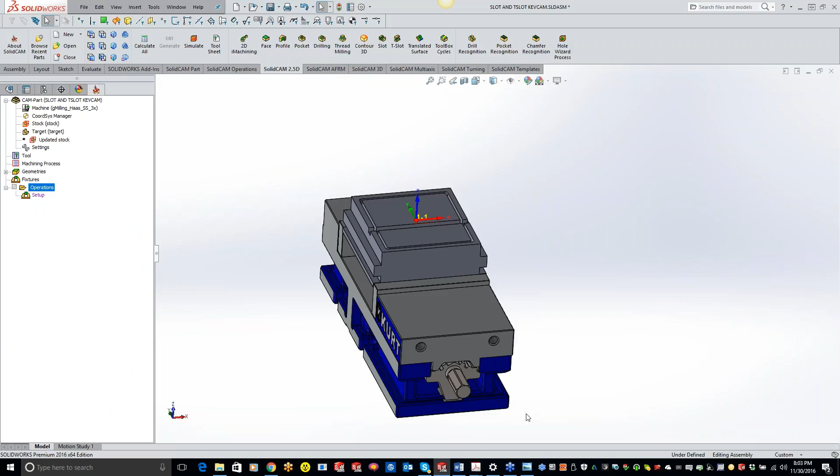But I think with that being said, we'll get the ball rolling here. Like I said, nothing too exciting tonight. We're going to be covering T-slot and slot. Came up with a part with a couple different scenarios of using the T-slot and slot. So with that being said, we'll get the ball rolling here.

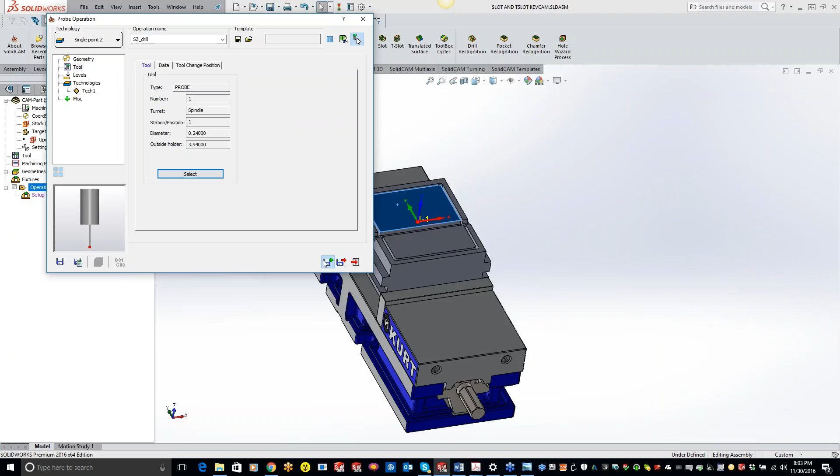So first things first, like I always like to do, is we'll add a probe on there. Find out where our part is located at. Let's do a Z touch-off point right there. Grab our tool. And save and copy. And we'll do, and got our tool already set. We want to do our X and Y.

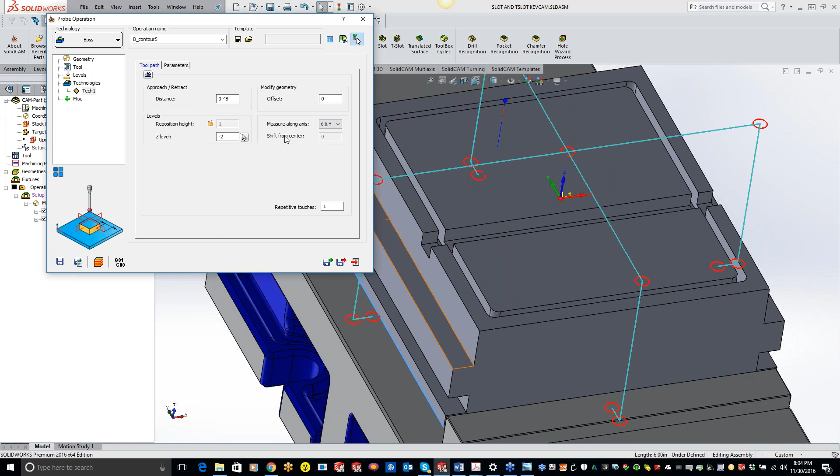And let's just do a show so I can see where I'm taking my hits here. Definitely hitting a little too deep, so I'll move those up here. Now this will be probing off the stock for you guys, and basically we're finding our X, Y, Z for our part right there. Okay, so now we have our part probed up. We know where our part is in our machine.

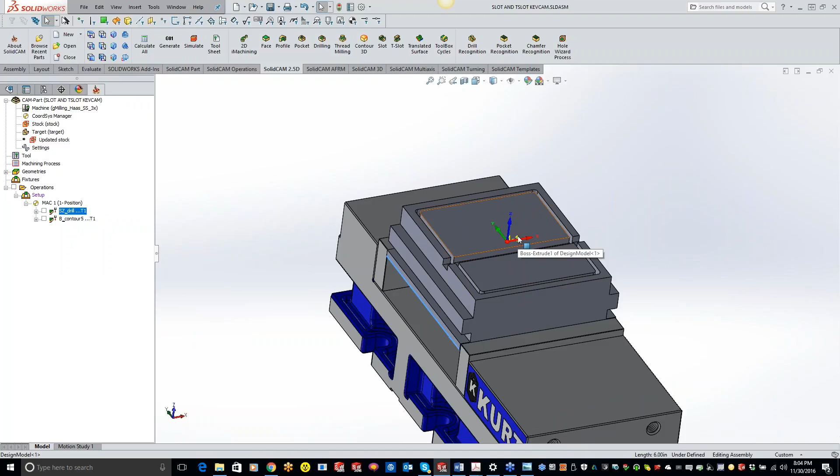So now what we're going to do is do the T-slot. Pretty simple, easy to use. With the T-slot and the slot function, you guys can do these functions in other operations like Profile or Contour 3D. What they've done is they kind of just simplified it for you guys just to make it more proficient.

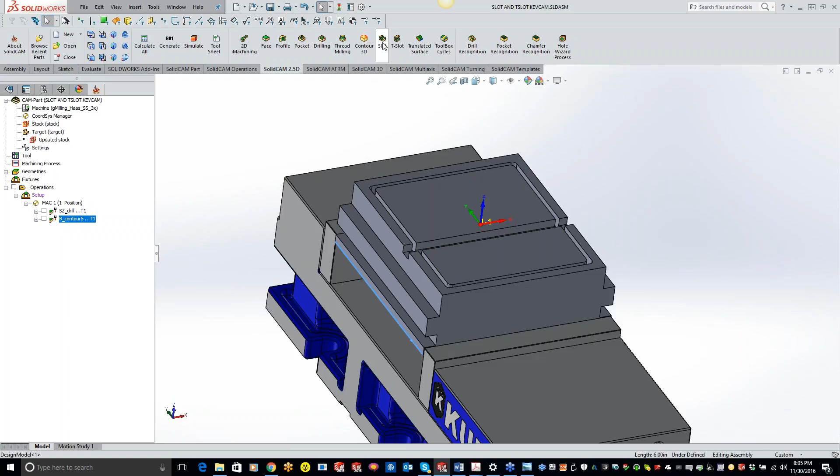So first things first, what we'll do is we'll just do a T-slot. And your geometry is going to be the innermost geometry that you want that cutter to come up to. So we're going to click on the inside of that wall. So let me delete that chain. I have my tangent propagation turned on here.

So grab that innermost part right there, and it's basically where you want the edge of the cutter to be riding along. Now, it doesn't matter, you know, the levels right now or anything like that. We'll hit our green check mark.

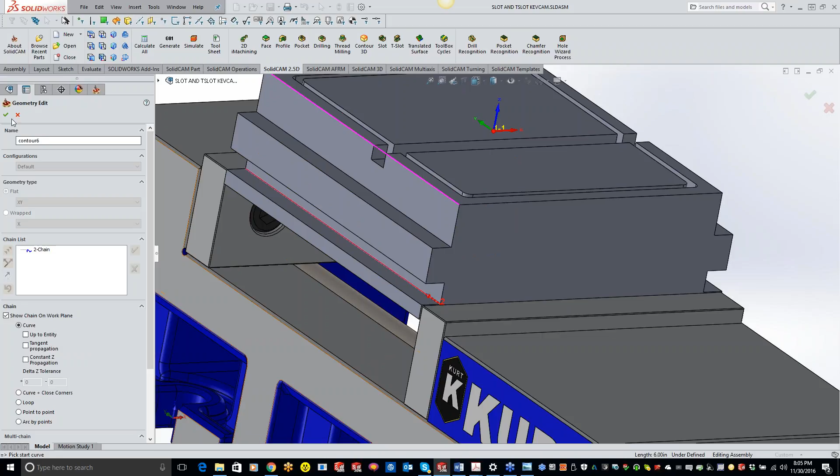And what I did is I have a T-slot cutter in here, and actually this T-slot cutter that I'm showing right here is the same cutter that you guys have in your library. This is a cutter that I pulled out of the master for, I can't remember if it was master for aluminum or mild steel, but you guys all have this T-slot cutter in there, and there are several T-slot cutters in there. I actually pulled these from where I used to work, just random tools there.

So we'll grab that. 1.5 inch diameter. We have arbor diameter, shoulder length. I have my tool holder on there. Let's turn some coolant on. And we're good to go now. Now the levels are going to look a little bit different than what you guys are used to seeing. So now we don't really have an upper level. It's going to be kind of pulling off of the clearance level, but it's asking you the ceiling height.

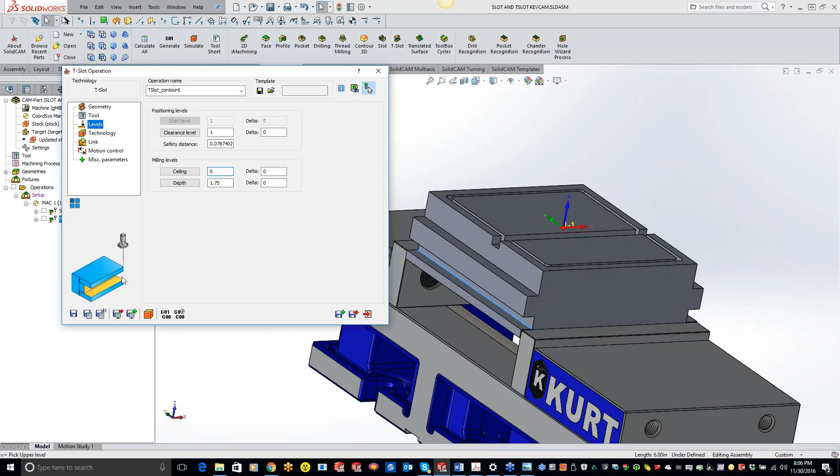So as I kind of highlight, or if I just click on it, you can see right here it's asking for the top portion of the ceiling. So we'll just click on that. And then how deep are we going? So now I'll just click on the bottom, how far we want to go down.

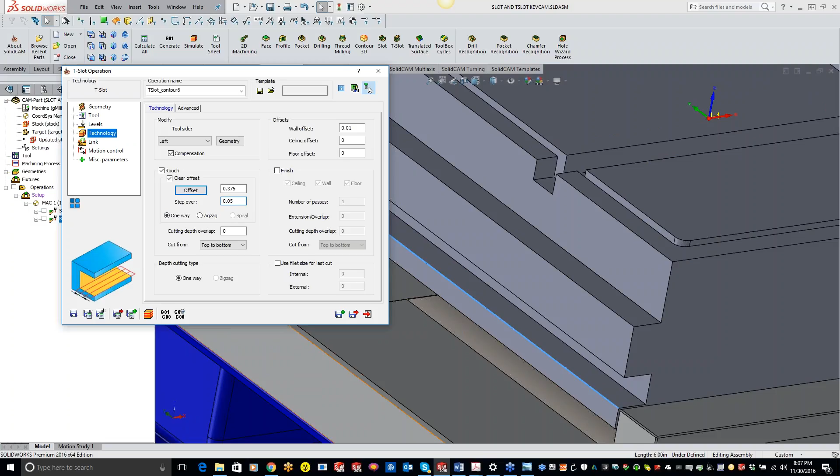Now in the technology, there's a lot of cool stuff in here. Usually with T-slot cutters, we're going to have to take multiple passes just because you can't really bite off a ton at a time. So what we'll do is we'll do a rough pass, and we'll do a clear offset. And then I'm going to offset it out to the outside of the geometry right here. And we'll step it over every 50 thou. So basically we're going to come in here, take a 50 thou cut, going along. It's going to arc out, come back, do another 50 thou cut.

Now, getting a little bit deeper in here, you can do zigzag one way. If we actually had this T-slot going around the entire part right here, we could actually do the spiral option. And that's kind of nice because it keeps that T-slot cutter engaged with the material the whole time. So a lot of cool little options in there. Now, working our way down here, our cutting overlap. Do you want to overlap the cutter, or do you want it to go to the exact point? We're actually going to overlap it. Let's just go 20 thou right now, so that way we don't have a little witness line there from where the top and the bottom kind of met up.

Then we have a cutting order. You guys can do from top to bottom, bottom to top, middle to bottom, or middle to top. So a couple different options there for you guys. So what we'll do is we'll just go from bottom to top right there. So that's going to get us all roughed out. Obviously, we want to come back and do a finishing and get that material out of there.

So what we can do here is turn on our finishing, and if we want to do a finish on the ceiling, the wall, or the floor, we can leave that offset in there. So we'll just leave a 5 thou wall offset, and we'll just do a finish on the wall. And doing the same way, bottom to top, and easy as that. Now, if you guys want, you can turn on your compensation. I think with 2016, the compensation should be automatically turned on for you guys.

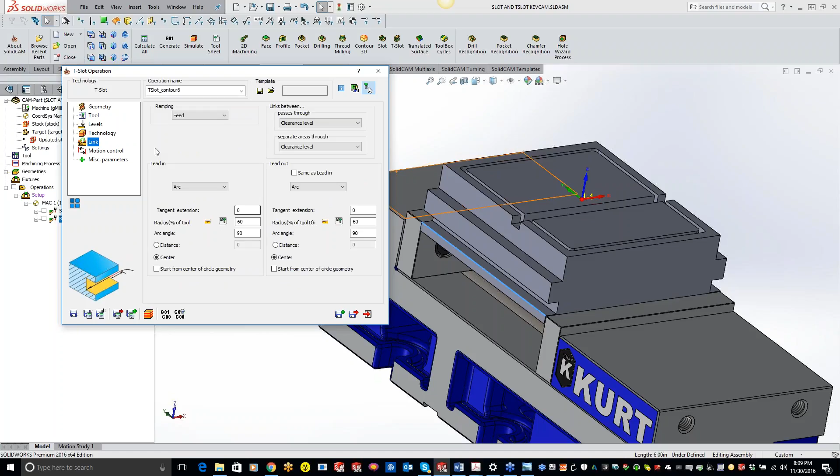Okay. So we can do cut depth, zigzag one way. You can do fillets. Go to our link, which is basically our lead in and lead out. So we can leave our radius in there. You can do a tangent extension also. One other thing here is in the geometry, we can actually extend it out right here too. So if you are in the technology section and then click the geometry button, it basically looks just like profile.

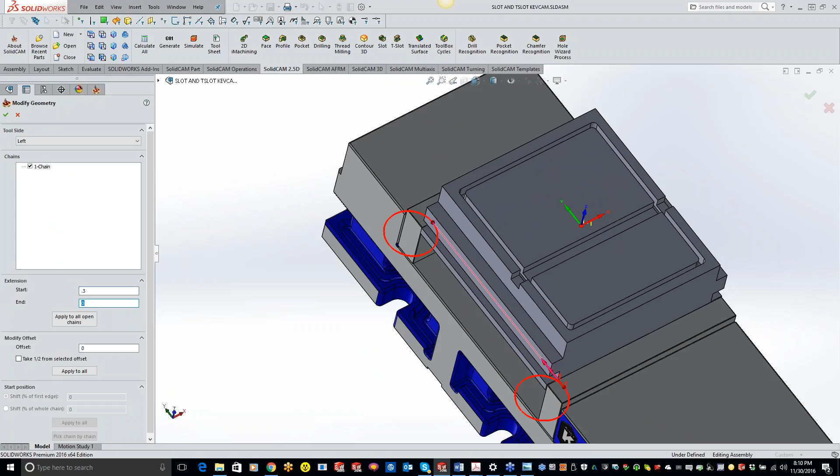We can add, you know, it might be a little much. Let's do 300 thou to our start and stop. So it goes actually beyond the part right there. And then we can say apply to all chains, and it basically scoots everything out that 300 thou for you guys.

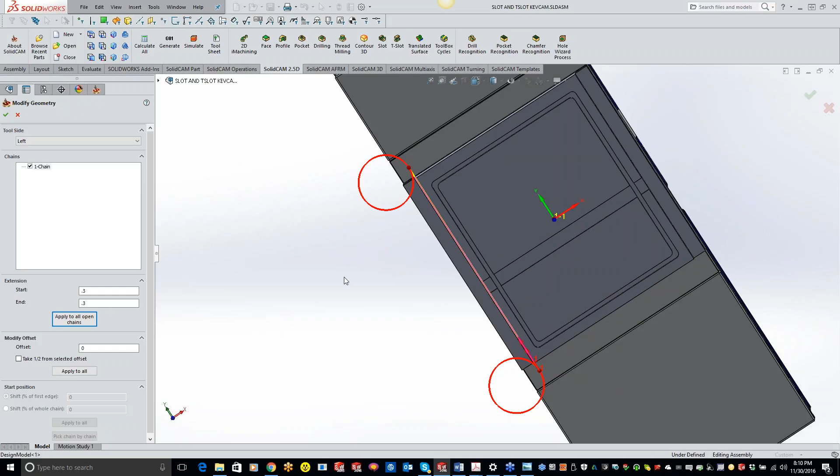Now, if we do a straight down view, we are still coming down on material, but since we are using that lead in and lead out of the arc, we'll be able to clear that material without any issues. Okay. So let's just do a save and calculate, and let's see what we have going on right here.

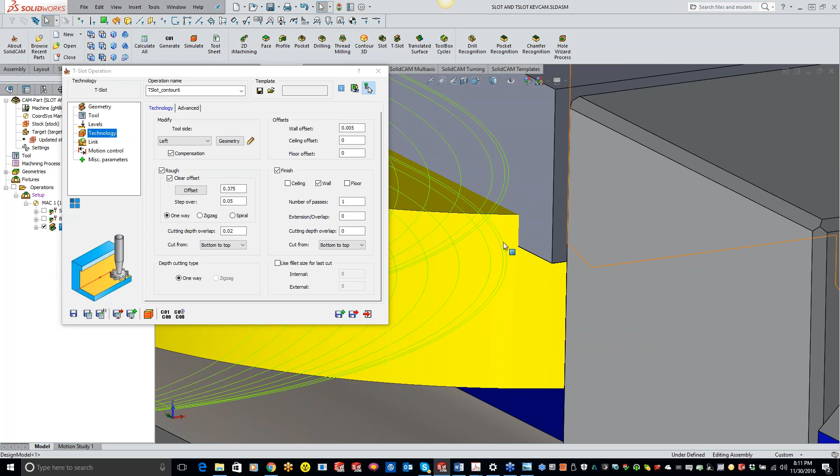So you can see we started at the bottom right here, taking its passes, and we can actually see our finish pass, which is our last green line right there, of wiping that additional 5 thou material off there. So let's go ahead and do a solid verify here. You guys can actually see what we're cutting here. So nice light cuts. We're not taking it all in one big chunk.

And you'll notice what it does is it actually does both. It gets both the upper and the lower at the same level. So it just doesn't focus on that bottom and then move up to the top. We did have that to begin with, but what we found out is we're actually getting a little bit of deflection when we were doing that. So we're kind of roughing it out all down to size for the upper and the lower.

And we can speed this up here a little bit. And you guys can see I am just barely clearing my Kurt vise there. I think I gave myself about 50 thou clearance there, maybe it was even 20 thou. But all said and done, we can check our size real quick. And it shows that we're right up to size, up to 0. Still showing that we still have material here.

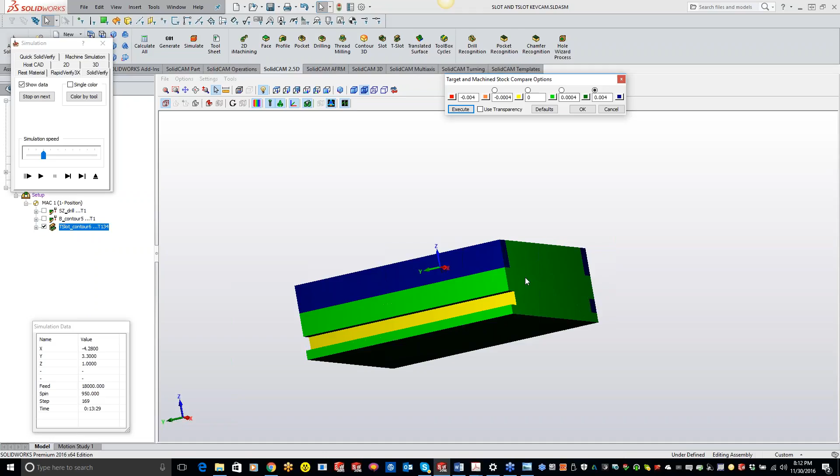And if those of you guys aren't sure what I'm clicking on here, it's basically looking at your stock target comparison, finding out how much material is there. So our part is where the green yellow is, I have a pretty tight tolerance right now, but anything beyond the green yellow or even orange is all additional material. So you can see that I still have all this extra material to still machine off.

Okay. So now what we need to do is we're going to do that same thing for the top right here. And I understand you guys saying, well, why not just do that with profile in a standard end mill? And most definitely, we could, and it's probably a much faster cycle time. But I just want to give you guys an example of what it's going to look like when it's taking multiple steps and we actually don't have a ceiling anymore.

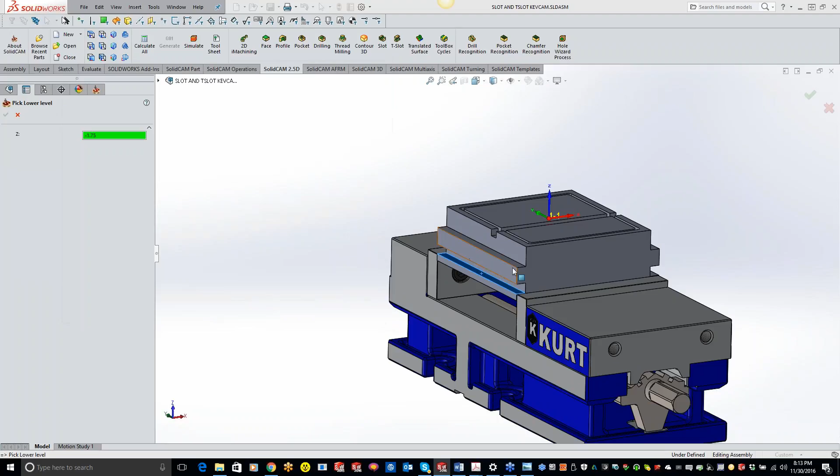All right, so what we'll do is just do save and copy, because we're going to be using that same end mill, same geometry. The only thing that we're going to be changing is the levels. So now our ceiling height is actually going to be the top of our part. And the depth will be to our bottom right here.

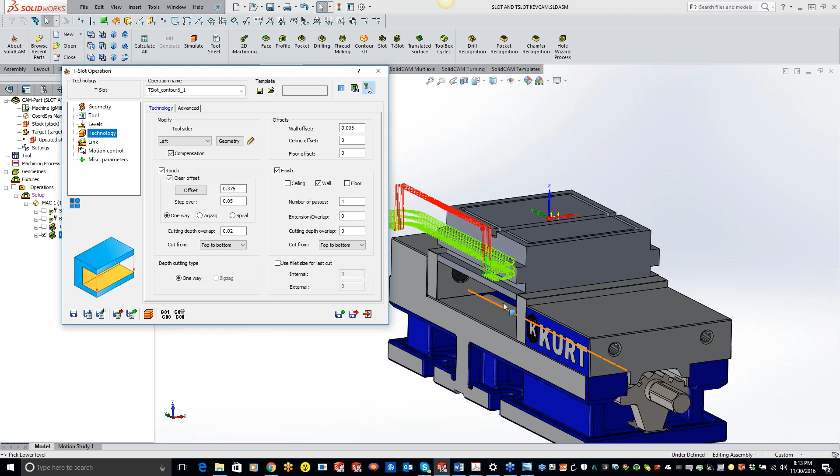And we can basically leave everything the same, except this time I'm going to start from the top. So that way I don't have anything above me, and I might as well start up on top and then work my way down to the bottom. So I'll just switch this, go from top to bottom. Save and calculate. And we get our toolpath again. Now you'll see we're actually taking this one in 3 passes. And it's all dependent on how much you want to go on your step down.

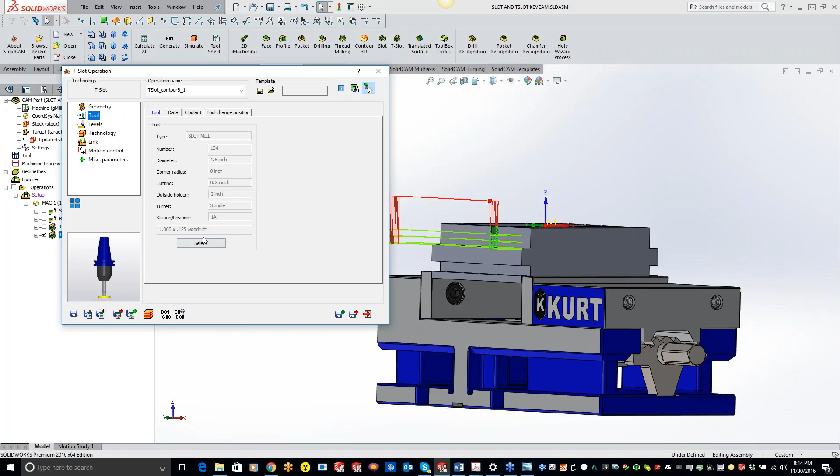If I wanted to go larger step down, I can make that number, or that's my step over. My step down is automatically calculated with the width of, I'm trying to find it here, of my cutting length right here. So it knows that it can only go a max of

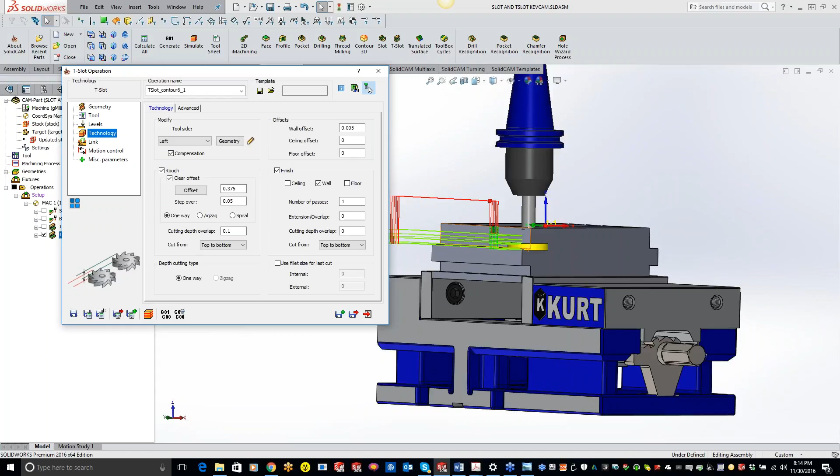0.25, but if I don't want to take it in that much, I can increase this cutting overlap right here. So if I do this to 100 thou, you'll see that we actually add additional passes in there because of the overlap. So a little bit lighter cuts on the cutter that way too. So we can simulate that here.

Like I said, getting it all to one level, going down to the next. If you guys want, you have the single step button right here. Instead of clicking this button, if you're getting to a spot, you can just hit the space bar on your keyboard, and that will go through for you too.

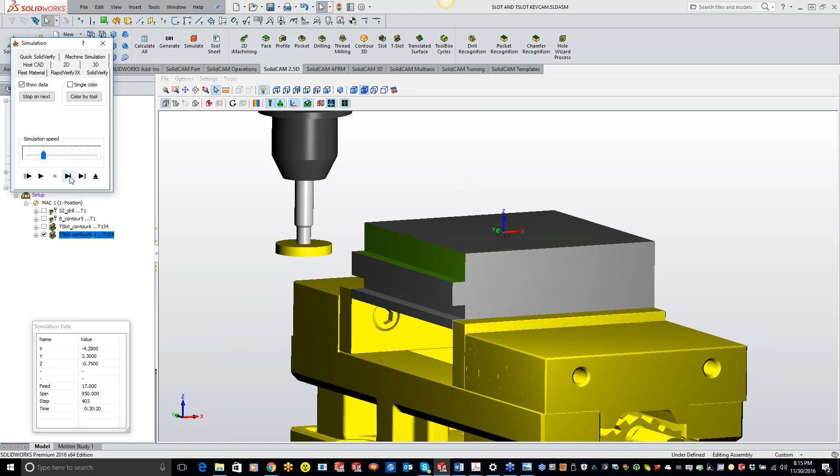Okay, so we got our T-slot for the bottom right here, and a T-slot with kind of an open top. Do we have any questions so far with the T-slot?

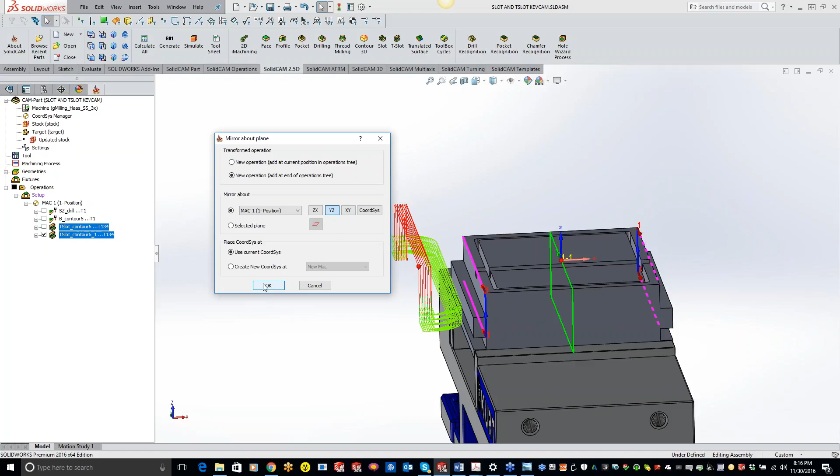Okay, so what I'm going to do now is, since we have the exact same thing on the other side, I could go through and make another T-slot operation. But to save us some time, I'm just going to right-click and use the mirror feature they added in 2016, and do my YZ. As I click this, you can see the plane in green moving around. So I'll do around there. You can do new operation or new operation at the end of the operation tree, so we'll do that option, and we'll just hit OK. Now we have both sides.

So if we want, we can go through Solid Verify just to make sure here. We're good to go. We can just double check it. So we're yellow and green, so we're good to go.

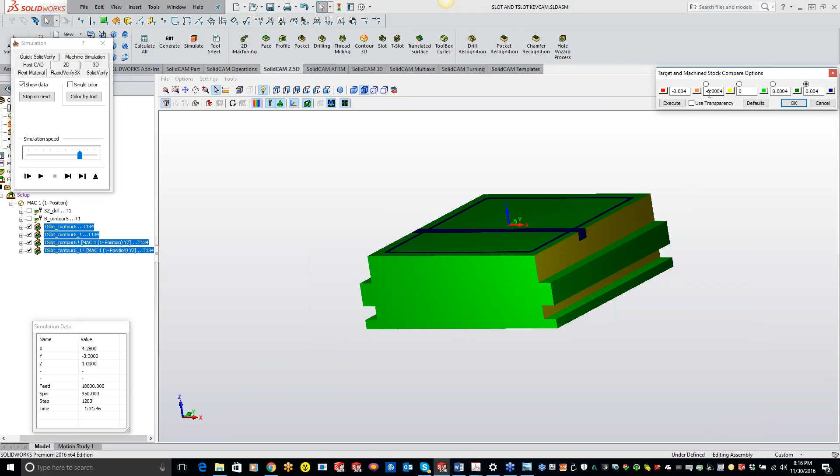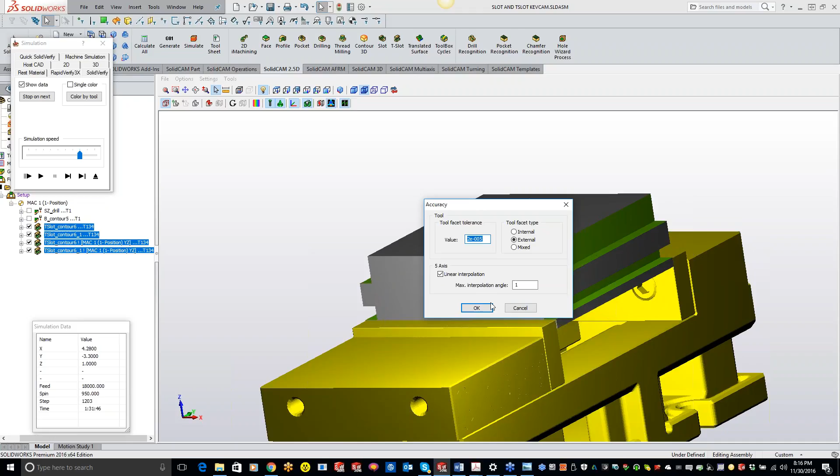With your tolerances right here, like I said, I have mine pretty tight. Now these tolerances are going to be based off of your accuracy of your model. Right now I have my accuracy set pretty tight so I can see it better. I think with the default install, it will actually be set to 4 thou, so definitely crank that up. It's going to take a little more cycle time to render it, but you'll definitely see a lot more detail the more you have in there.

So we can zoom way in on this part here and see how nice our cuts are, see our surfaces and all that good stuff.

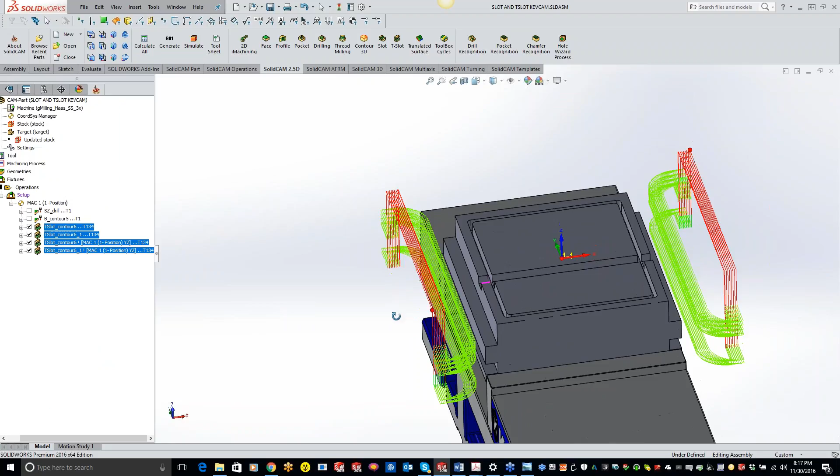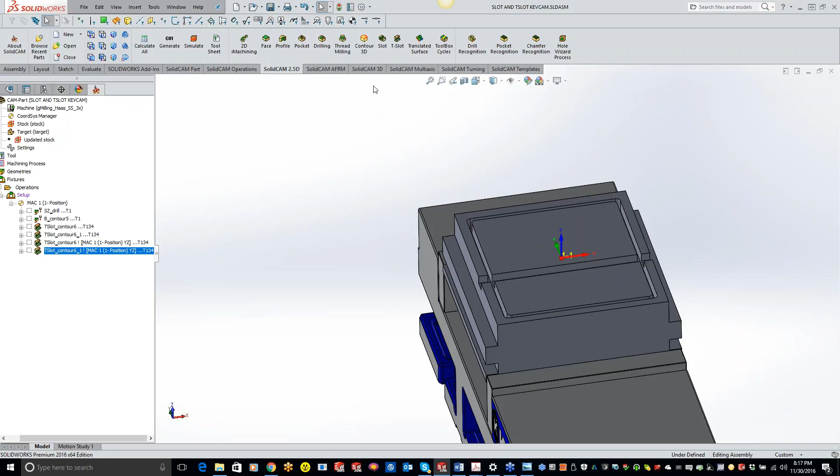So now what we're going to do is let me uncheck these. And what we're going to do is the slot. Now the slot feature is a dummied down version of kind of the profile. They kept it real simple, easy to use, not a lot of gizmos and functions in there. So we'll just go ahead and click the slot. What we'll do here is I'm going to do these two slots right here, so we'll grab that one.

Kevin, when you get a chance, there's a question regarding the simulation shortcuts. Like you were saying, if you're on that play button, you can hit the space bar - I think that's what Ronnie was asking. Oh, okay.

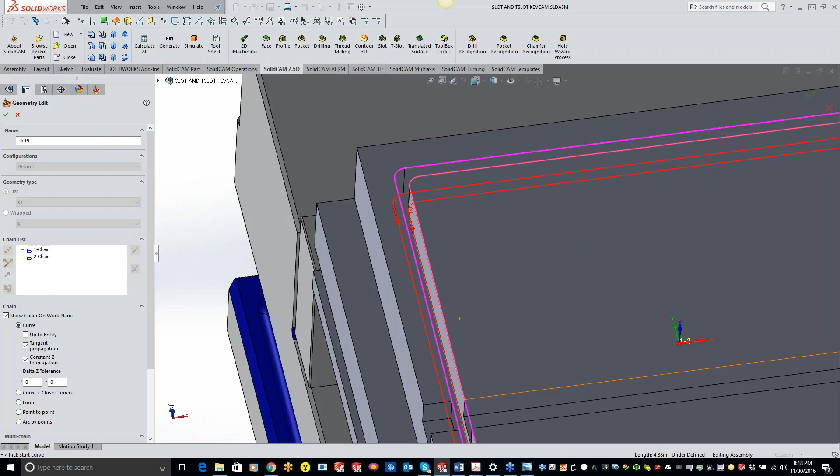Ronnie, I don't have a list of actual shortcuts or short keys. That's the only one I know about, and there's actually one I just found out about today, and it's really nice. Let me exit out of here. To answer your question, Ronnie, that's the only one I know about for the simulation - hitting the space bar when you're on single step mode.

But let's say I want to chain the outside edge of this part. Normally what you'd have to do is - hang on, let me turn off my propagation here, let me delete that - if I wanted to chain something, normally you'd have to click there, hit the green check mark, go to your next chain, click the green check mark, go here, click the green check mark.

So I just found out today a trick to this: when you go to chain, if you hold your control key and then just click where you want it, it will automatically accept those chains for you, so I'm not having to come over and click the green check mark. Then when you're on your last chain and don't want to do any more, just hit the green check mark and it adds all those chains. So that's a little shortcut for the chaining technique - if you have multiple chains, just hold your control key and it will basically automatically hit that green check box when you go to click on your next chain.

Am I seeing it right that it's actually doing extensions, or is it just chaining the actual entities themselves? Yep, it's just chaining the entities themselves. Okay, so it's not doing an extension or anything like that.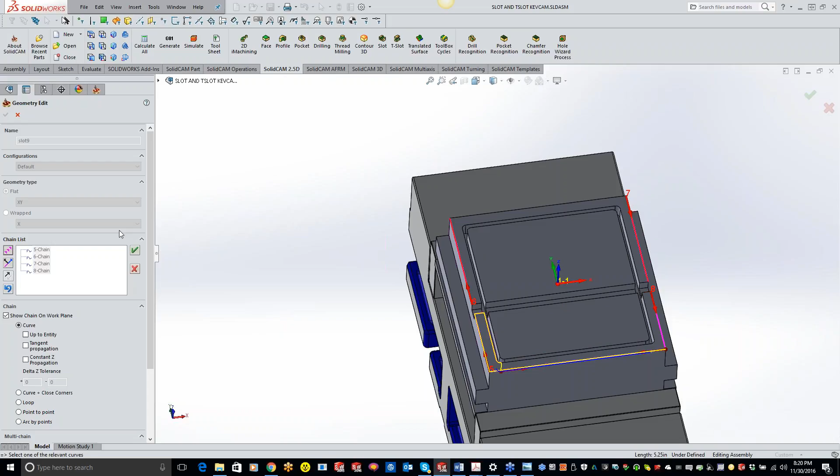But if you guys do a lot of single entity chain picking, it's a cool feature they added of just hitting that control key. Okay, so we'll get back to our slot here. Oop, got my wrong one.

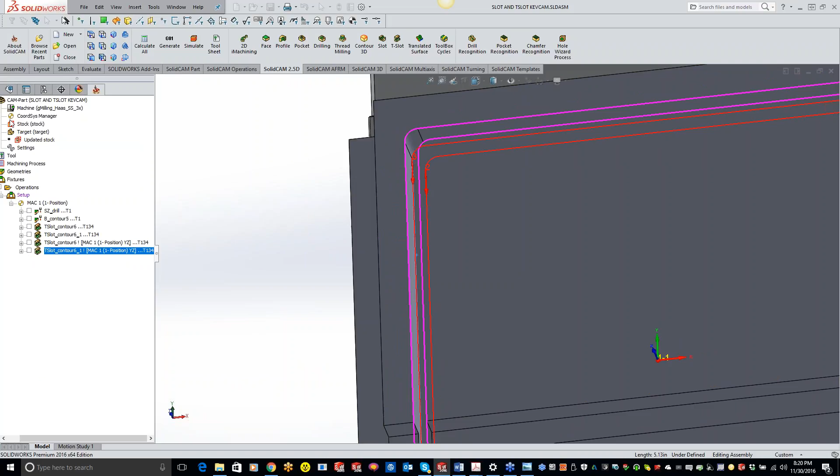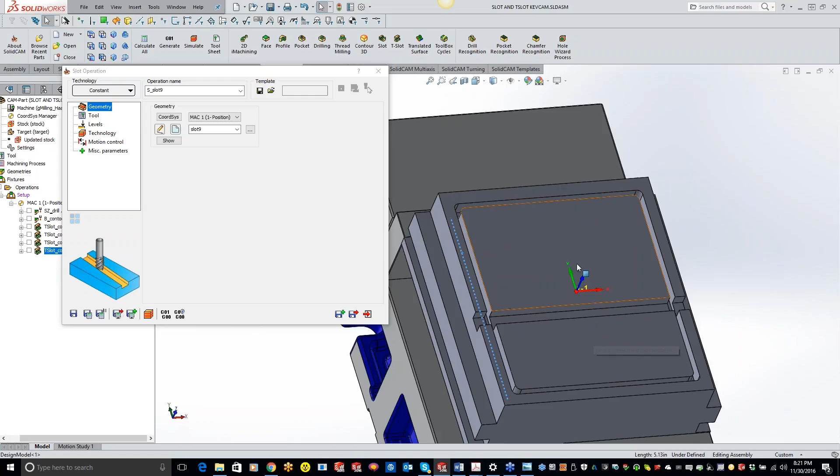And I'm going to do this like an O-ring groove here. I'm just trying to give you guys examples, and I know some of you might say, well why don't you use the toolbox cycles, because in toolbox cycles they have a real nice O-ring. Just trying to show you each functionality that's in the software. I know there's a million different ways to program this part, but just trying to give examples of the different operations we have for you guys.

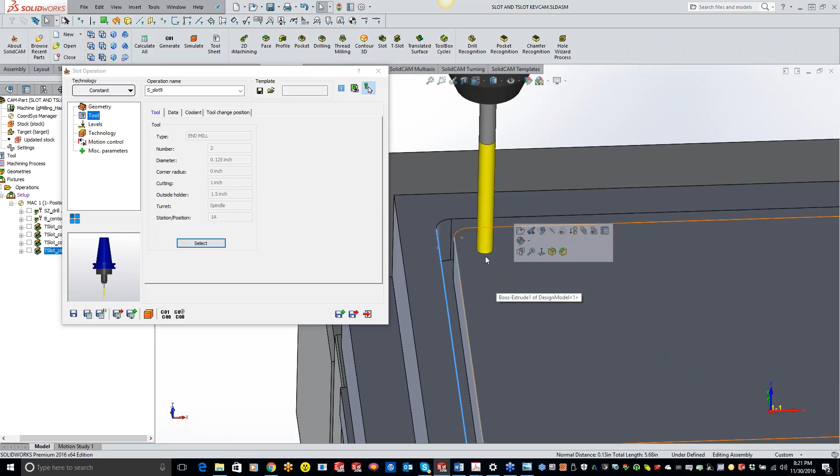Okay, so we'll grab a 1/8" end mill here. Now our slot actually is, I think it was 200 thou wide. No, it's right to size, so actually I didn't even need to pick that second chain. Oh, I do need to pick that second chain, because if I just do that outside chain, it will actually skip this radius on the inside corner here.

So, okay, go to levels. Upper level is already there. There actually is no lower level in here. So when you guys are doing your slotting operation, you can just go to your geometry tool. You can skip the levels unless you have a different upper level, and then change it right here. So what we'll do is just change it to left.

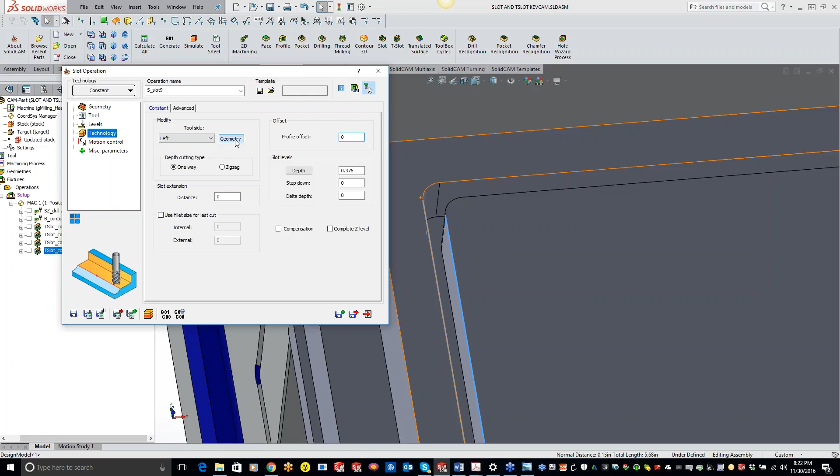And looks like I need to change my direction of chain 1. So what I'll do is just reverse that. So you'll see my tool is now inbound with the geometry that I want to go with.

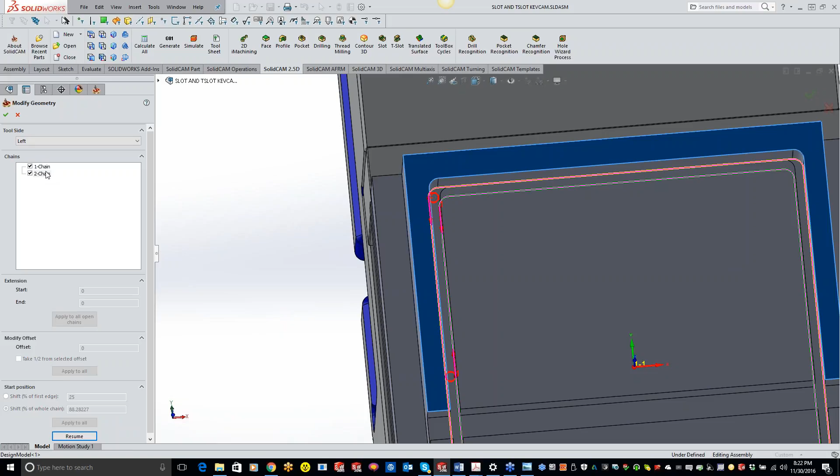Now if I wanted to start it, you'll see that we're starting right on a radius there. I want to start this halfway through the part on a straight surface. So what I'm going to do is extend it off. We'll go to chain 2 now and bring it to right there, so we're starting on a flat spot instead of right on the radius.

Now what I just showed you guys there is on the SolidCAM professional test. So just a little heads up, take your notes.

Okay, so now in here is where they kind of kept everything in the technology section that you need. So we have our slot depth. I can come in here, grab the bottom of that slot. I can tell it I want to go down every 100 thou. I can put a delta depth if I want to go a little deeper. I can turn my cutter comp on. If you had an open slot, we can extend it out right here. But like I said, it's basically a simplified version of profile, so we just don't have the finishing, the roughing, all that stuff. It's all going to do it right here for you.

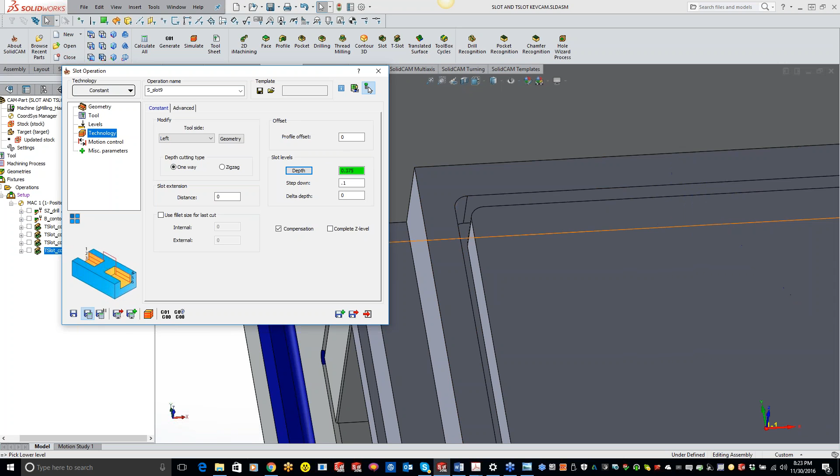So we'll just do a save and calculate, simple enough. Do a solid verify here for you guys, and just working our way around, getting that slot out of there. And you might be able to see now, let me just get rid of my holder. You'll see probably would have cut off that, wouldn't have gotten a perfect radius for the inside there.

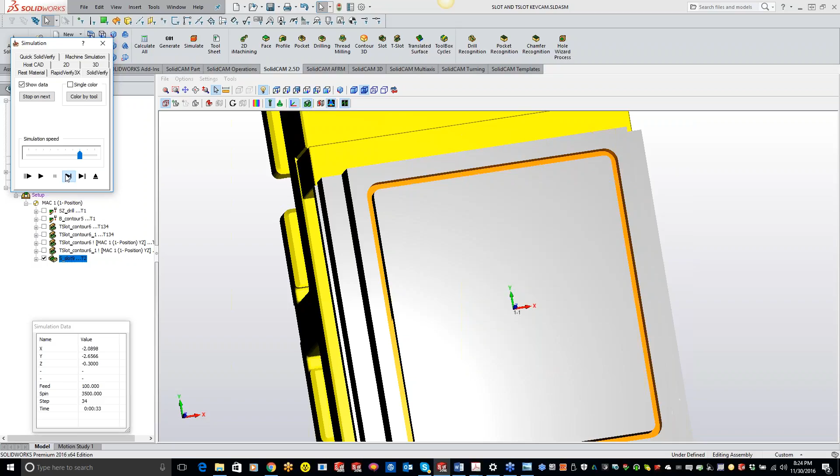But, any questions on anything that I've covered so far, guys? I know it's kind of a boring subject, but no, I'm kidding.

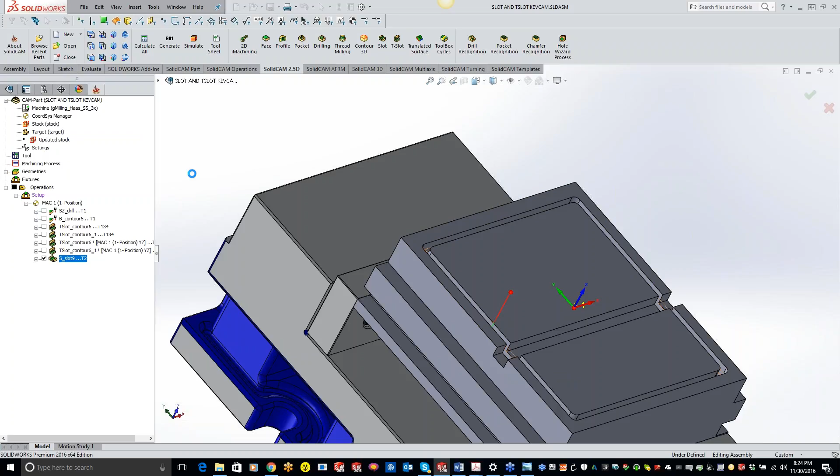Okay, so we'll do another slot right here, and we're kind of doing an open slot. Now what I'm going to do here is another slot operation. For you guys that have open geometry, we have Kevin with a question regarding spiral or ramping, and I'm thinking he's referring to depth type. Yeah, let's get in there.

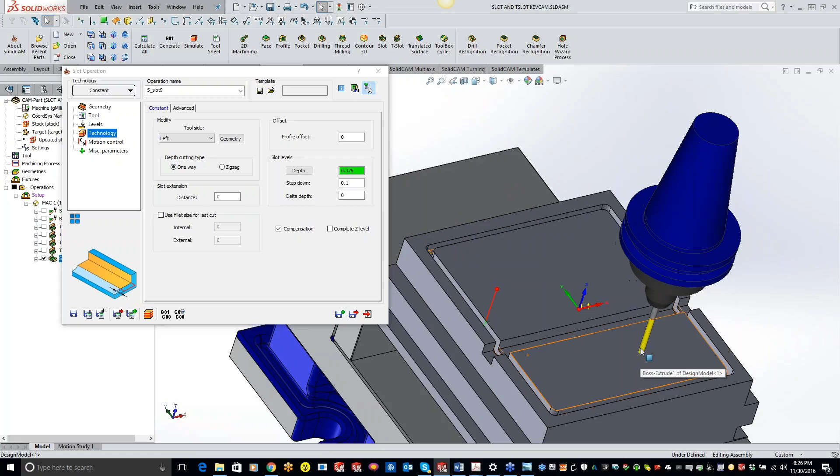simplified slotting operation. So like I was saying, if this was myself, I would use the profile operation and use the spiral feature, so I can start off shallow and slowly keep engaged all the way around that part. I also have a lot more options for my engagement, but just not, like I said, it's a pretty simplified operation right here.

To be honest guys, I've been using SolidCAM since 2007, and I've used this once. So I just like profile because you have more tools inside there to fine tweak it. More control, yeah. Whereas this is kind of just a standard - it's simplified, click, click, done. Simple, easy.

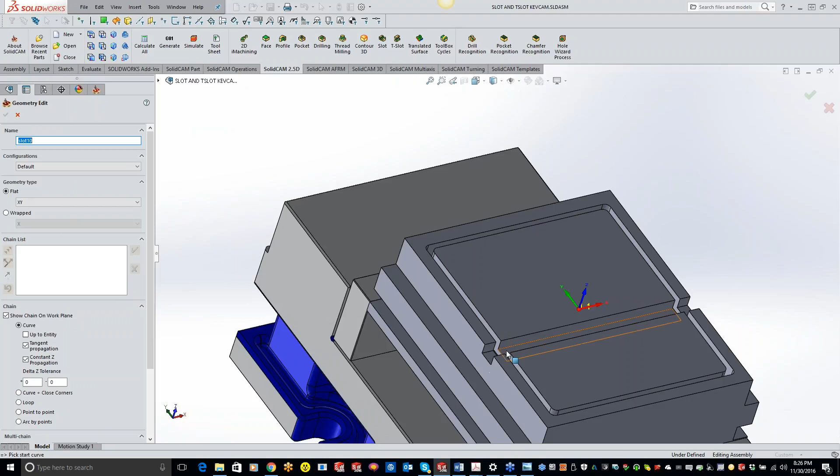Okay, so now we'll do that other slot here. So what I'll do is slot. And so what I was getting at with the geometry, we have kind of a gap right here. So a couple ways to go about that.

What you guys can do is draw a sketch in there, a little bit cumbersome. So what we're actually going to do is the point-to-point feature - basically start point, end point. So easy as that. Then I can hit my green checkbox. I have that one, we can go back to point again.

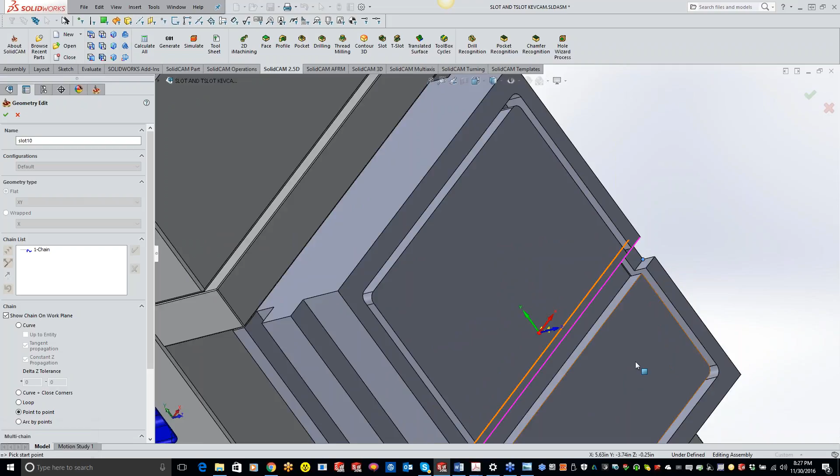And this works excellent for just kind of avoiding those gaps in there.

Okay, so we'll grab this guy right here, and like I said, just skip the levels - I'm just so used to going to levels with all the other stuff in there. Slot depth, set it to right there.

We can do a step down of 100 thou. And while I'm being left, we can come in here - both my chains are going the wrong way, so we can just do a reverse all. And let's go ahead and add an extension on there of

0.2. And we do apply all.

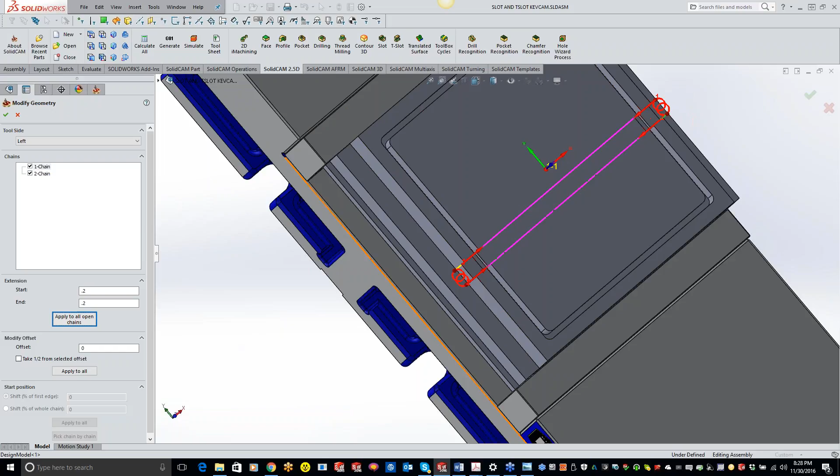Now, if you guys wanted, since we have two chains right here, a different extension from chain 1 to chain 2, all you have to do is uncheck - so let's say on chain 1 I want 100 instead of 200 on the end, and on chain 2 I want 200 for the start and end. So you guys can individually pick them, or if you want to apply it to all of them, you can apply it to all of them.

Okay, turn on cutter comp right there, and we'll just do one way, save and calculate. And it's telling me I have empty geometry. Where do we have empty geometry?

Let's see, you got our tool. We can just grab our upper level just to make sure. And you can also add an extension right here if you guys want.

What am I missing here? Tim, what am I missing? Oh, what? Oh, sorry, I dozed off. Yeah, I figured - just kidding.

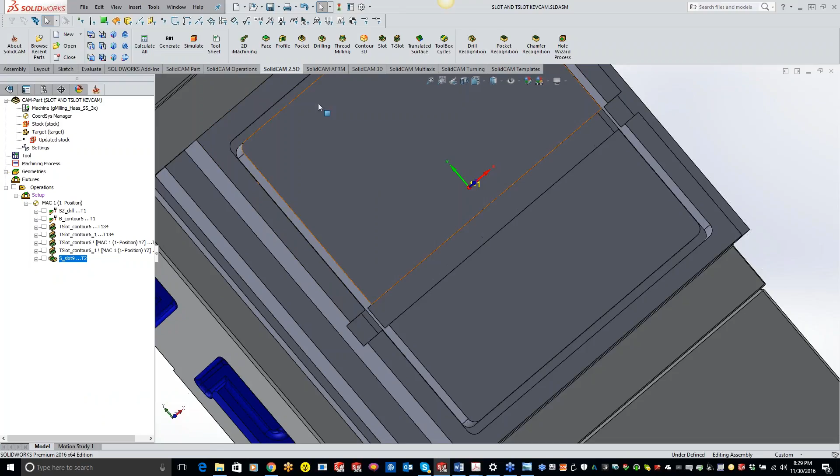Oh, I see it's saying something about the geometry. Let's see, we'll try it again. Geometry doesn't have to be closed.

No, you got a single line geometries there. George mentioned templates for the slot, for doing ramping in a slot operation, but I'm guessing George is referring to the slot - what do you call those other tools? Oh, toolbox cycles? Toolbox cycles probably is what George is referring to there.

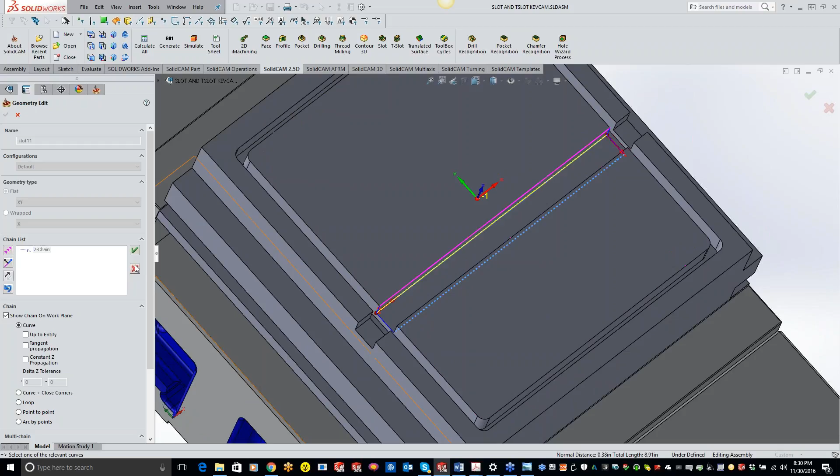Wait a minute, what do we got going on here? Let me get out of here for a second. New. Turn off my propagation.

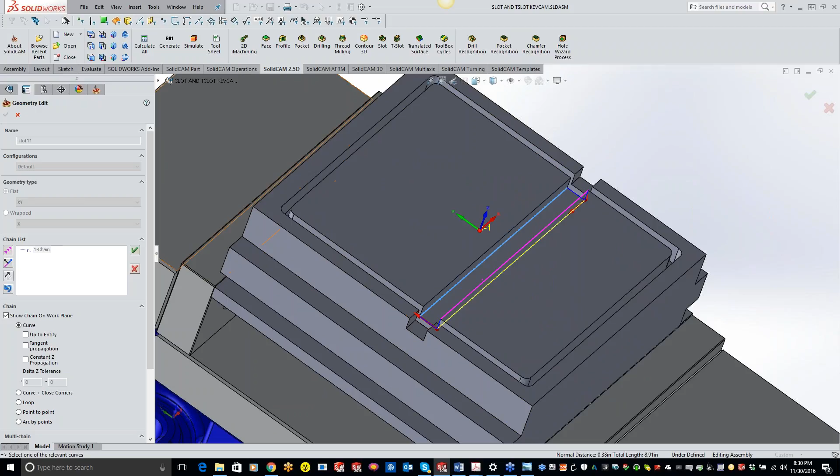Curve. It's like it's not grabbing my chain. Let's try this. Yep, gotta re-grab my tool here.

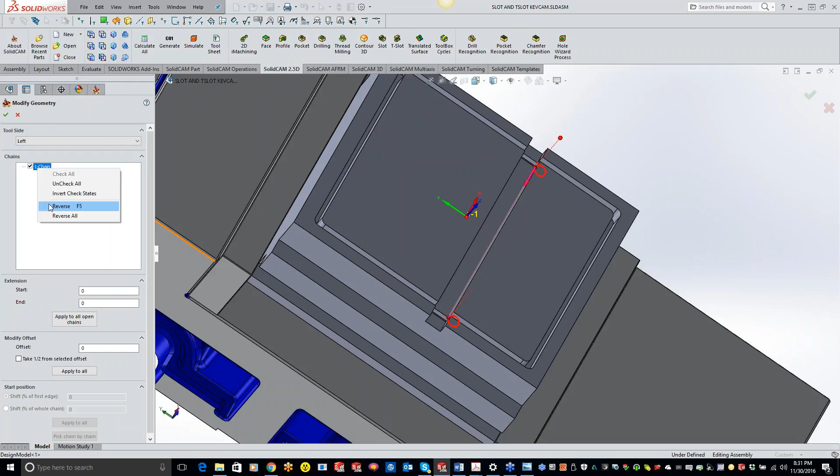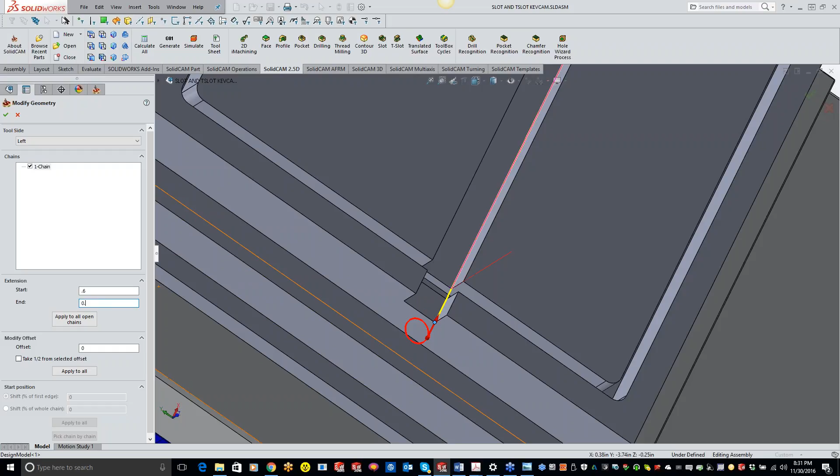And we'll do left, and I need to reverse. Okay, so I picked this chain a little bit different. I didn't do point to point, but you'll see I didn't get all the way out to the end of my geometry. Another thing you should be able to do is highlight what you want right there. Sometimes you can actually highlight some of the fields and click and it will automatically fill the number in for you. Let's do a 0.6, and we'll do a 0.6. And now you can see that we covered that additional area right there.

Save and calculate, and we can do multiple step downs. So right here you can see taking it in 100 thou increments. And then obviously we're doing 250 thou depth, so that last one is going to be 50 thou.

So what's George saying? There is a template that will do the ramping and slot. Yeah, like I said, I'm just kind of going over the slot feature right here. But for what George is saying, in the toolbox cycles we have spiral open slot. This is actually what we're going to be going over next week. Open with one end. So a lot of different options in here, and I think that's what you're looking at, George, for your template.

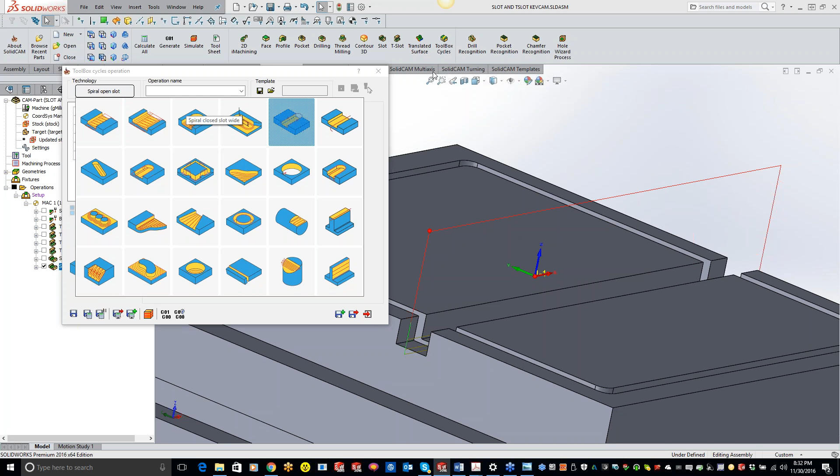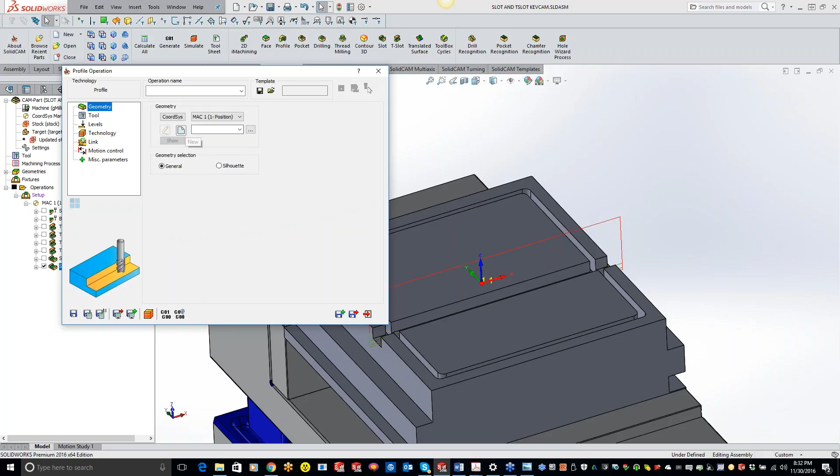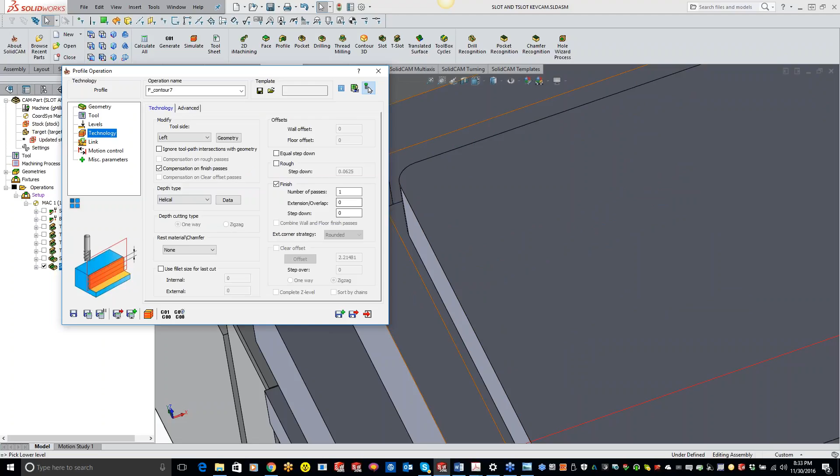Also, if you guys wanted to do something for this center O-ring here, and Ronnie was talking about, let's just add one here. Just do a profile. And that looks good. Tool, select, use our 1/8 inch. And we'll do a helical. And we'll just do a step down of 50 thou. So now what we're doing is we're actually ramping, coming in the material at Z0 and slowly moving in there.

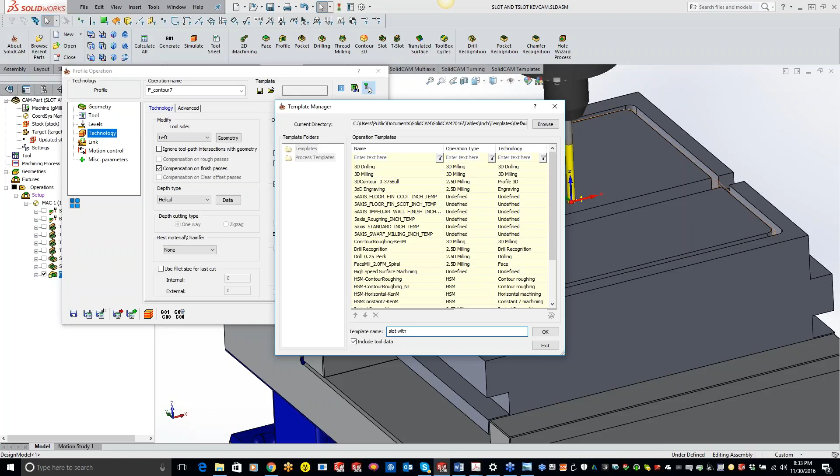So what you guys could do from right here is, if this is something that you guys do often, or this is something you guys like, you can come up here and save this as a template, and we can just say slot with spiral. Hit OK. So now I've saved that template.

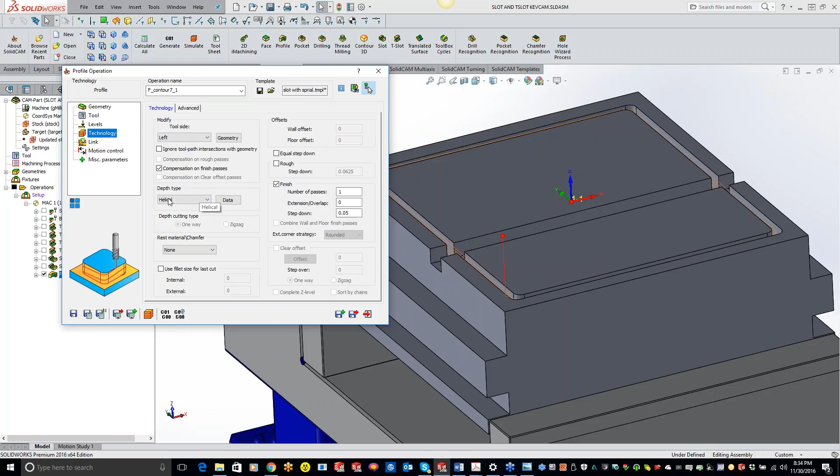So now if I come in here and add a profile operation, I can actually load my slot with spiral right there, hit OK, and I just have to find the geometry. I think this is it. Yep. And it's got my tool in there. It's got my helical entry, doing a helical all the way around, doing a step down of 50 thou. So you guys could do that as a template too.

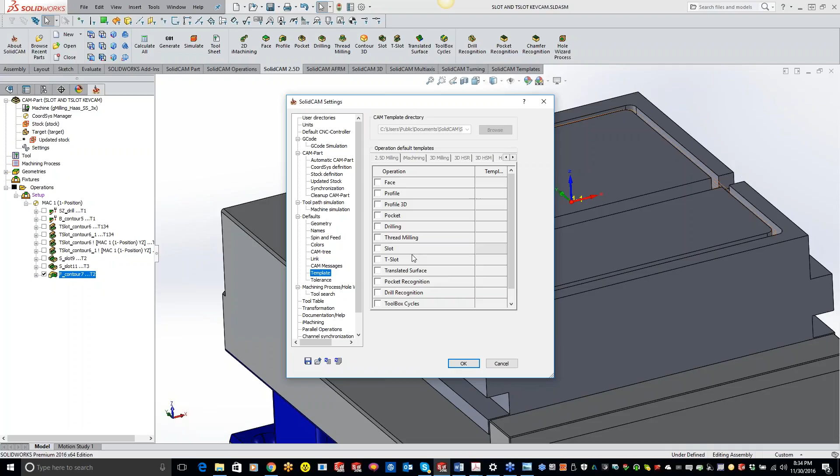But George kind of reminds me of a good point. Let me see something here. If I go to my SolidCAM settings, there is a template section right here. And so what we could do too, kind of what George is saying is, well, no, because it's not going to exist for the slot because it doesn't do the helical feature. You could make that as your default, I was thinking, but unfortunately, since we used it as a profile, we can't use it as a slot just because the slot feature doesn't have the helical roughing down.

Okay, yeah, kind of like you mentioned before, Kevin, using the profile operation gives you more options to be able to do a little bit different things. And the more options is nice, but like Tim was saying earlier, if you're just looking for something simple, easy, that's kind of what the slot is built for. So let's just do a sanity check here, make sure we have everything. We'll pull it up in Machine Sim so it looks even better for you guys. And let's go ahead and slow it down a little bit.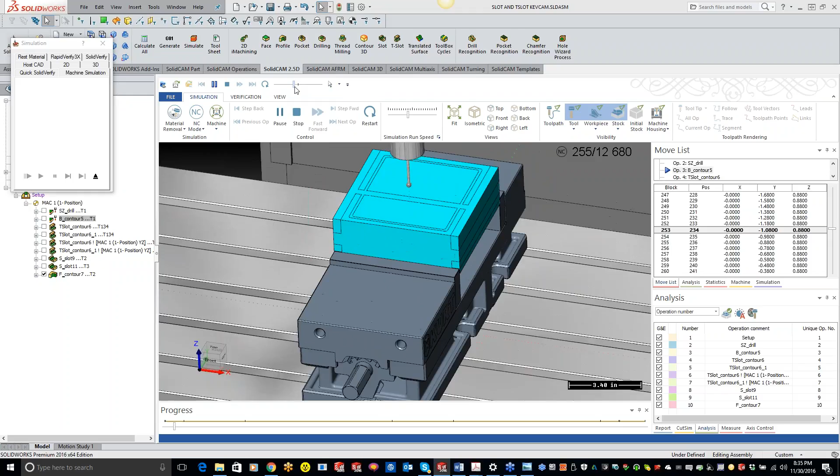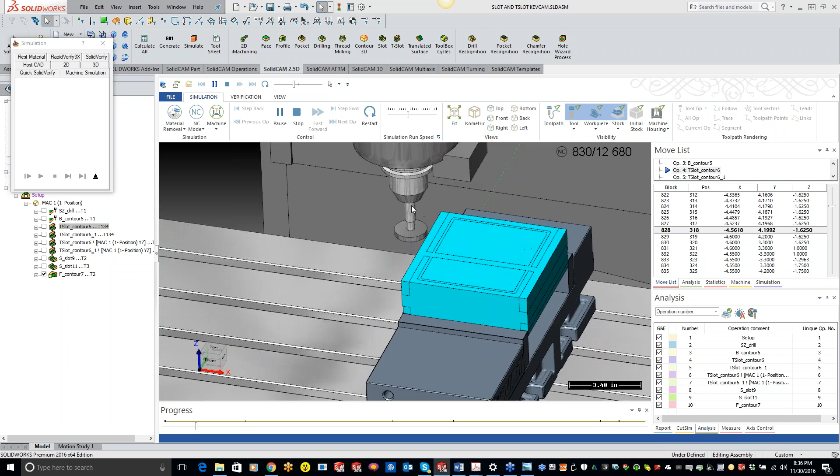Okay, probing up our part here. And I really like using this probe function, because at the shop that I used to work at, we would always have to manually type in our dimensions for our probe web, 9014 or 9013, I can't even remember offhand right now. And now you can do it right inside your CAM. So see, we're doing our T-slot there. I can speed it up a little bit here. Doing the top. And then it's going to do the mirror option.

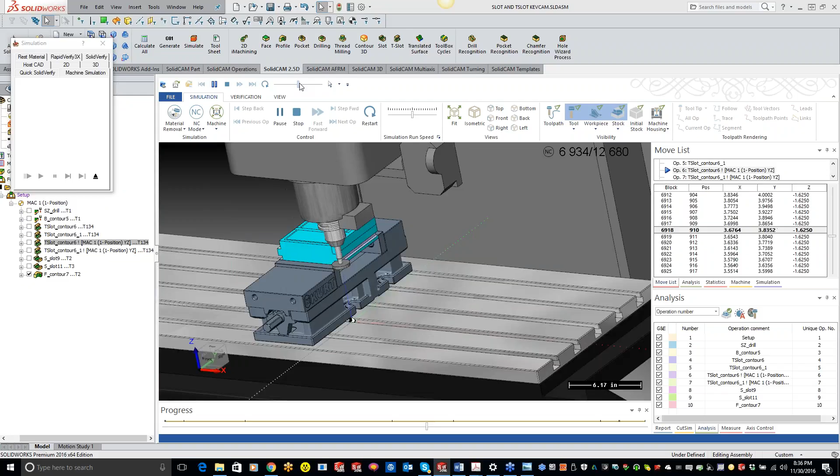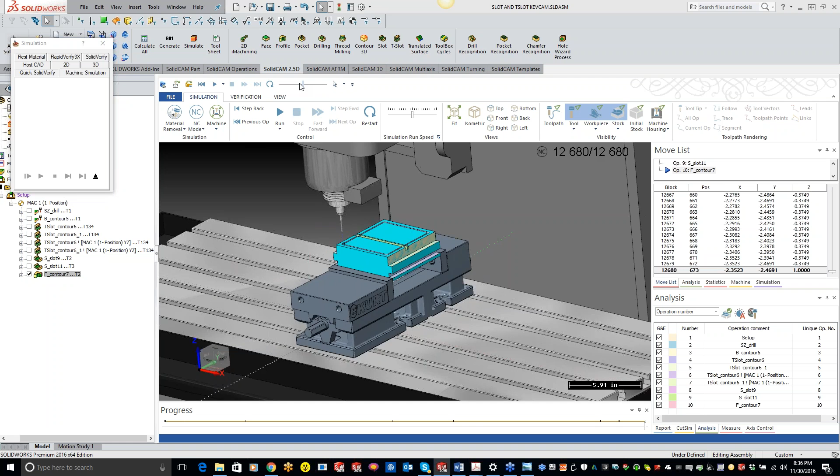So Nicola's got a question regarding the machine simulation: how do you get that nice machine simulation window? What you're used to seeing, I'm guessing, is just standard SolidVerify. This machine sim is just a standard Haas VF4. You can see the whole outside, the machine housing and full crash detection, stuff like that. So the machine sim is a small added cost, but the cost is so small that if you break one tool holder, it pays for itself.

So I highly recommend it to anybody. A lot of times they'll tell you don't worry about machine sim if you're running 3-axis or smaller. I would recommend doing it all the time, just because with some of these tool holders, you pile it up, or you pile up your part, you just scrapped out a tool holder, a tool, you ran across the part, and like I said, that pays for the machine sim just in one sitting right there. So,

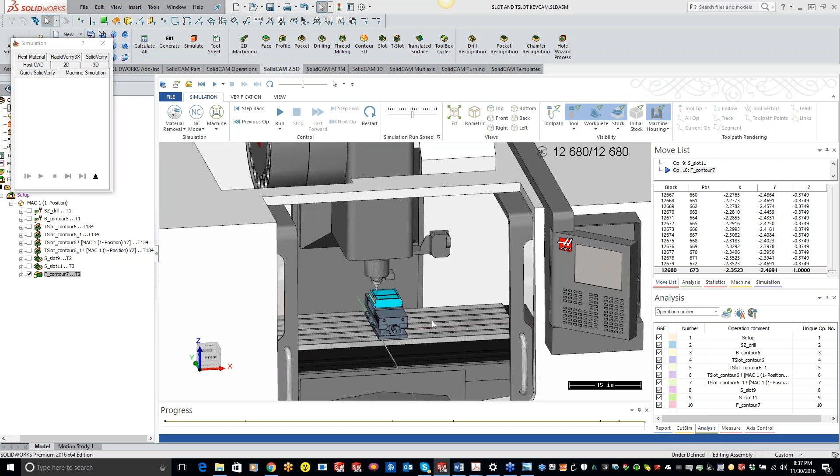but it looks like we have a complete finished part here. Let me just turn off the shroud here so you can see all the way around. Yep, looks like everything's to size. And I can tell everything is to size because the colors are kind of fading. I'm not sure if it's coming across the GoToMeeting well, but you can actually see the colors are fading throughout.

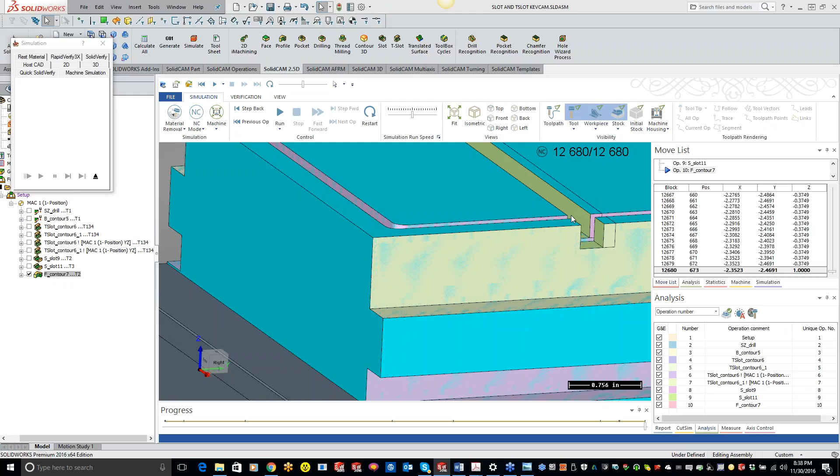You'll actually see right here, when I did that slot, I'd actually forgotten to chain my other side, so I'd have to come in there and finish that off. That's a great spot when you guys are in Solid Verify.

If we play everything through here. I've definitely talked about it with my salesman. Nicola, where are you located at? I'm looking it up myself right now. That'd be Brendan's territory up in Quebec. Oh, okay, up in Canada.

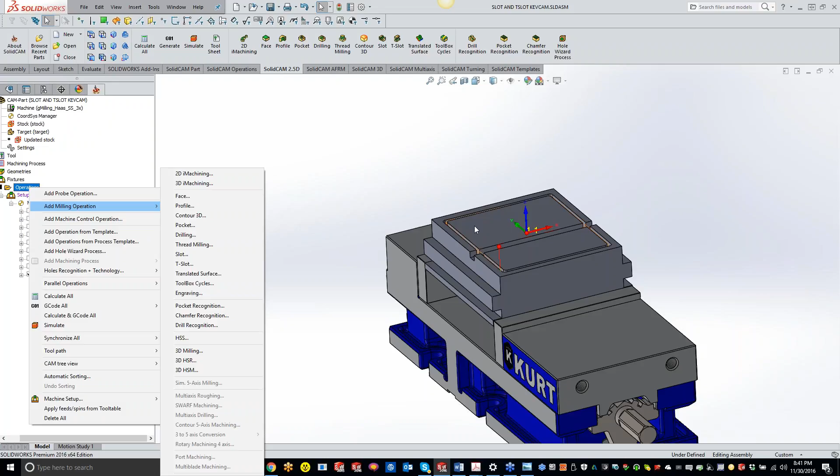So, is there a way to automatically increment the serial numbers? Yes, there is. We had somebody ask that question last week. Nicola, are you running a Haas, or what kind of machine are you running? Yep. So what we do is we build a macro in there. If we had serial number 1 on here, every time we machine that part, that serial number will increase. So it'll be 2, 3, 4, 5, 6.

It will automatically do that, and that's actually inside the post. We turn that on, and that would be inside your miscellaneous parameters as incrementally engraved number, something like that. So definitely, Nicola, do you have Eric Middleby's contact information?

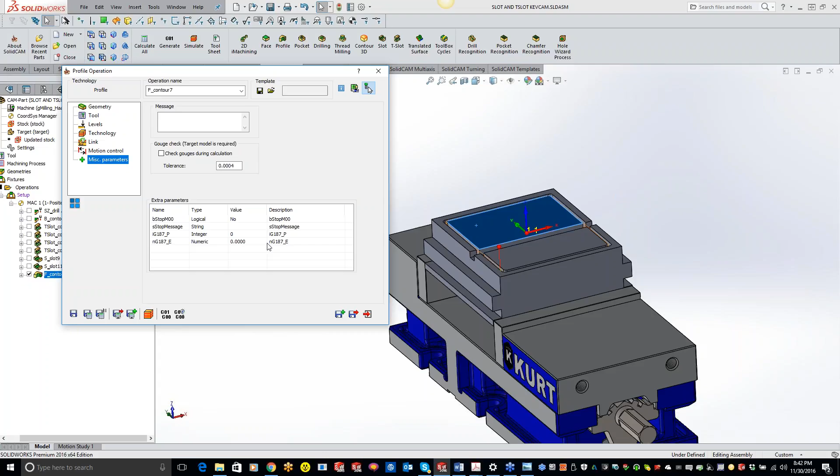Yes. Okay, let him know, and he should have everything set. Russ actually created a macro for it, so if you just mention Russ created a macro for it, he should be able to get it for you. And that goes with anything, guys. If you guys are looking for something, definitely let us know. Any other questions that I can help you out with, guys?

Now we're getting a little off subject because we're talking about engraving and toolbox cycles, but that's all right. We needed something exciting, yeah, to slide.

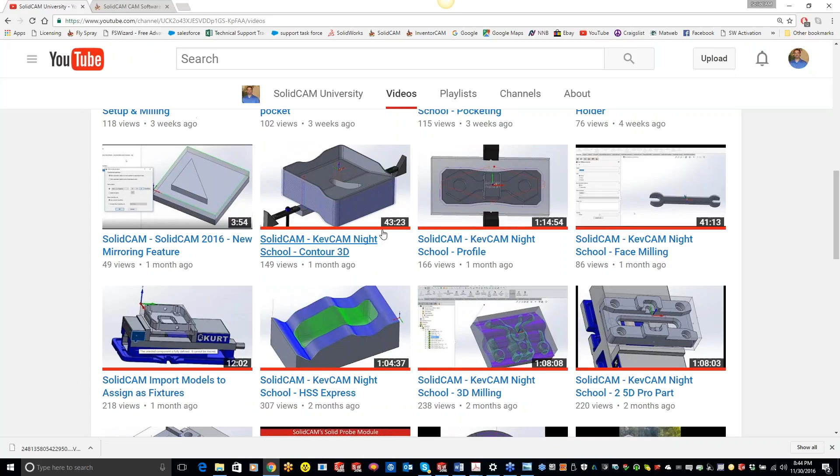I did tell some of you guys my goal is to get this channel to beat Sydney. I'm replacing Sydney. So no, a little friendly competition, but like I said, guys, thanks again for sitting through the night class. And thanks for taking your time out of your night. I know you guys could be doing something much better. I see Harry DeLeon on there, and Harry's got the coolest Dodge Viper that he told me I can come drive anytime I want, so he could be working on that and listening to my night class.

Hey, Kevin, you mentioned the certification program, did you cover much of that? I heard you mention it just briefly. We're working on it. For those of you guys that aren't sure of what's going on here, let me just open up SolidWorks real quick, and I'll show you what we're doing to follow along with the SolidWorks certification.